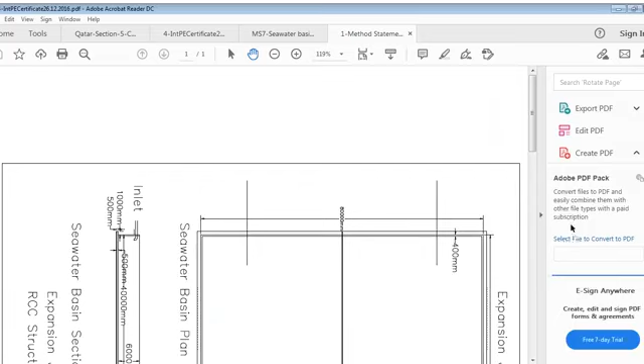This is some basin for which I will talk about water tightness. Now, in this range, has some information about this. We talked of concrete yesterday, and we'll go back to that one.

We go to this file, section 5 of concrete, and I was at, I think I don't know which page it was. We had talked of precast concrete. Precast concrete - we had to talk of precast concrete. This was actually not recorded.

Structural precast concrete - this was not recorded due to technical problem, I don't know what. I wrote to them but no answer. So I'm going back to talk of it again. Structural concrete again. Structural precast concrete - previous was we have completed that with structural precast concrete, and the end of the part was something else. So now we are going to talk of structural precast concrete.

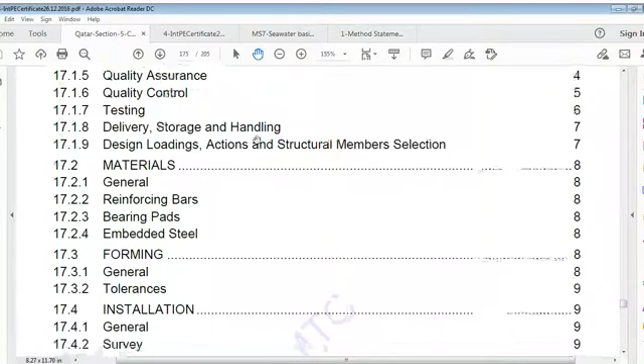General scope, references, submittals, qualifications, quality assurance, quality control, testing, delivery, storage and handling, design, loading actions, and structural member selection, material, general reinforcing bars, bearing pads, embedded steel forming, general tolerances and installation, general survey, guying, bracing and shoring, adjustments and correction, erection tolerances, welding, grouting, and field cutting.

Structural precast concrete - work included in this section comprises furnishing all plant, labor, equipment, appliances, and material, and performing all operations in connection with structural precast concrete works. Let me put my mask on better.

This aggregates - this is part 2 aggregates, part 3 is cementitious materials, part 5 admixtures, part 6 property requirement, part 7 concrete plants, part 8 transportation and placing of concrete, part 9 formwork, part 10 curing, part 11 reinforcement, part 15 hot weather concreting.

References are AASHTO standard specification for highway bridges, section 25, ACI 523.2 guide for precast cellular concrete floor, roof, and wall units, ACI 533 guide for precast concrete wall panels, ACI 533.1 on design responsibility for architectural precast concrete projects, ACI 543 design manufacture and installation of concrete piles.

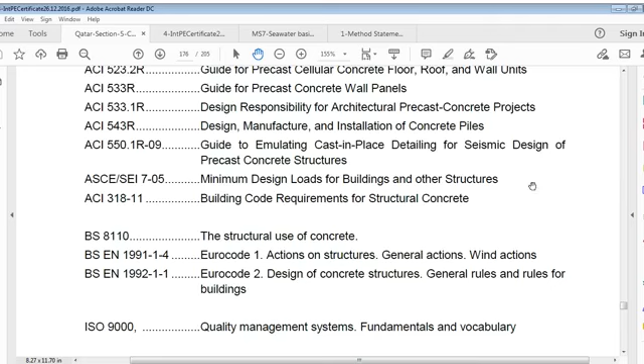ACI 550.1 guide to emulating cast-in-place detailing for seismic design of precast concrete structures. ASCE 7-05 minimum design loads for buildings and other structures. ACI 318-11 building code requirements for structural concrete. BS 8110 structural concrete. BS EN 1991-1-4 Eurocode 1, actions on structures, general actions, wind actions.

BS EN 1992-1-1 Eurocode 2, design of concrete structures, general rules and rules for buildings. ISO 9000 quality management systems fundamentals and vocabulary. Prestressed Concrete Institute, PCI manual 116.

Submittals: manufacturer's literature. Contractor shall provide copies of manufacturer's specifications and installation instructions for each item of proprietary material to be used, showing compliance with this specification. Information on equipment, embedded items, and other accessories shall also be provided. Design mixes: copies of mix design, support materials; requirements of mix design shall be in accordance with part 6 and 7 of this section. Product design criteria, loading for designs.

Initial handling and erection stresses. All dead and live loads per specification on contract drawings or as required. All other loads specified for member where they are applicable.

Product design calculation: design calculation shall be performed by a structural engineer experienced in precast concrete works. They shall cover all the stages of handling, transportation, and erection. Design shall be carried out in accordance with requirements of BS EN 1992-1-1 or relevant ACI codes and shall be accepted by the engineer. Calculations for design of precast members shall be supported by a statement explaining principles of design and type of analysis adopted. Influence of individual members in achieving overall stability of structure should be considered.

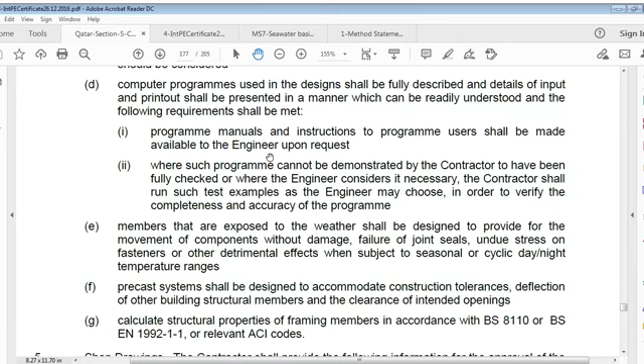Computer program used in this design shall be fully described and detailed. Inputs and printouts shall be presented in a manner which can readily be understood, and the following requirements shall be met. Program manuals and instructions to program users shall be made available to the engineer upon request where such a program cannot be demonstrated by a contractor to have been fully checked, or where the engineer considers necessary. Contractor shall run such test examples as the engineer may choose in order to verify completeness and accuracy of the program.

Members that are exposed to weather shall be designed to provide for the movement of components without damage, failure of joint seals, undue stress on fasteners, or other detrimental effects, and subject to seasonal or cyclic day-night temperature range.

Precast systems shall be designed to accommodate construction tolerances, deflection of other building structural members, and clearance of intended openings. Calculate structural properties of framing members in accordance with BS 8110 or BS EN 1992-1-1 or relevant ACI codes.

Shop drawings: contractors shall provide the following information for approval of the engineer, a layout plan and detailed fabrication and placement drawings for each structural precast element. Shop drawings are to include the following information: size, grade, profile, and dimensions of all materials used.

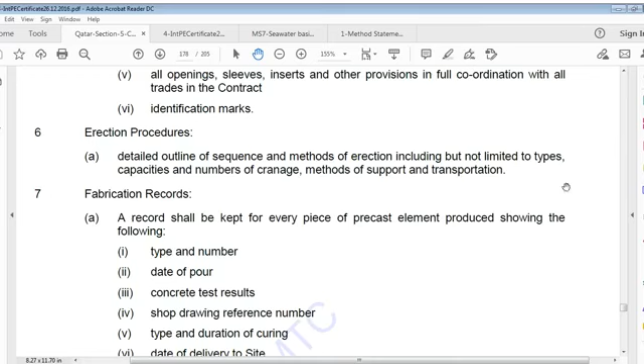Connection and anchorage details, lifting devices, location, handling limitations, steel reinforcement details, all opening sleeves, inserts, and other provisions in full coordination with trades in the contract, identification marks, and erection procedure. A detailed outline of the sequence and methods of erection, including but not limited to types, capacities and numbers of cranage, method, support, and transportation.

Fabrication records: a record shall be kept for every piece of precast element produced, showing type and number, date of pour, concrete test results, shop drawing reference number, type and duration of curing, date of delivery at site, and date of fixing in position. Test reports: copies of all testing and inspection reports, and test trial panels.

The contractor shall provide these trial panels in accordance with the requirements of Part 1 of this section. Trial panels shall be retained for reference purposes for acceptance of production work.

Qualifications: structural precast work shall be executed by an approved specialist subcontractor for casting and also for transportation, handling and erection. The contractor may execute this work himself if it can satisfy the engineer that it has sufficient experience and expertise in this field.

As a minimum, the contractor shall provide satisfactory evidence that tradesmen and their supervisory personnel engaged in such work have successful experience with work comparable to that shown and specified, and provide details of organized quality control and testing procedures.

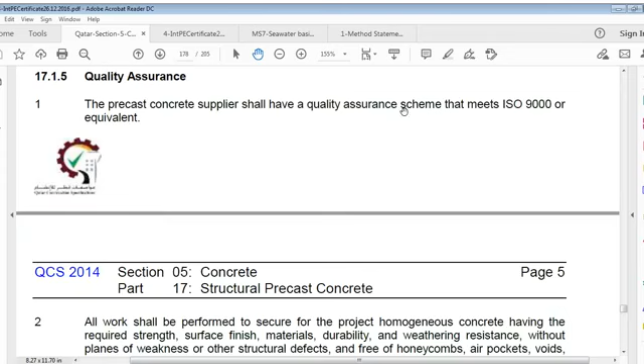Quality assurance: precast concrete supplier shall have a quality assurance scheme that meets ISO 9000 or equivalent. All work shall be performed to secure for the project homogeneous concrete having required strength, surface finish, materials, durability and weathering resistance, without planes of weakness or other structural defects, and free of honeycombs, air pockets, voids, projections, offsets of plane, and other defacement of concrete.

No alteration or substitution of the structural system shown on the drawing is permitted unless otherwise specified. The contractor shall supervise and coordinate all phases of the structural precast concrete construction process and be responsible for the complete manufacturing process.

All methods of manufacture and practices of handling raw materials and manufactured concrete shall be reviewed by the engineer before execution of structural precast concrete work, at least 14 days before the beginning of precasting work.

Only materials of known quality shall be incorporated in the work. All materials shall be properly selected, reviewed and approved by the engineer before use and maintained during shipment, storage and use. Construction systems and techniques shall be properly selected, reviewed and approved by the engineer before use and maintained throughout the complete structural precast concrete construction phases.

Adequate spare equipment, parts, additional components and repair facilities shall be available for all tools and equipment. Regardless of approvals by the engineer, the contractor shall be responsible for all methods of structural precast concrete work.

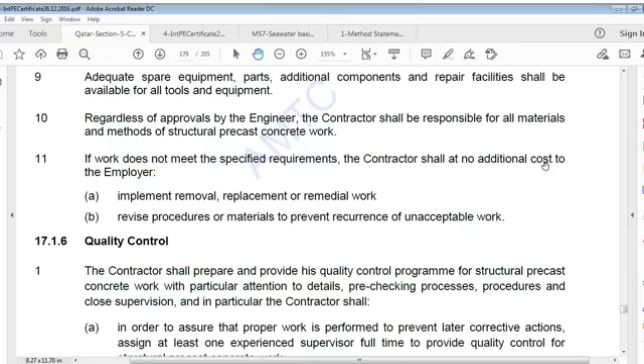If work does not meet specified requirements, the contractor shall, at no additional cost to the employer, implement removal, replacement or remedial works, and revise procedures or materials to prevent recurrence of unacceptable work.

Quality control: the contractor shall prepare and provide a quality control program for structural precast concrete work, with particular attention to details, pre-checking procedures and close supervision. In particular, the contractor shall, in order to ensure that proper work is performed to prevent later corrective actions, assign at least one experienced supervisor full-time to provide quality control for structural precast concrete work.

This assignment will not relieve the contractor's other quality control personnel of their duties related to quality control of structural requirements and surface finish of structural precast concrete work.

The contractor shall arrange for training of its quality control personnel who perform quality control of structural precast concrete work, and whose training shall include but not be limited to material evaluation, special mix design technique, mix placement, vibrator selection and use, formwork detail, formwork protection, release agent use, reinforcing steel detailing and installation, finishing equipment and technique, corrective procedures, and protection of completed work.

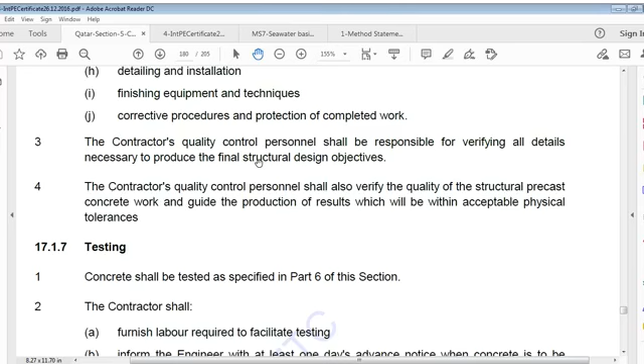The contractor's quality control person shall be responsible for verifying all details necessary to produce the final structural design objectives, and shall also verify quality of structural precast concrete work and guide production of results within acceptable physical tolerances.

Testing: concrete shall be tested as specified in Part 6 of this section. The contractor shall furnish labor required to facilitate testing, and inform the engineer with at least one day's advance notice when concrete is to be placed.

Provide facilities for the concrete cube test. Test cubes: provide material samples and access to materials as required for testing. Should the batching plant be located more than 500 meters away from the site office?

Contractor shall provide suitable transport accessible to the engineer for the sole use of the engineer's staff. Contractor shall station a qualified technician at the casting site to continuously test, inspect and report on the following.

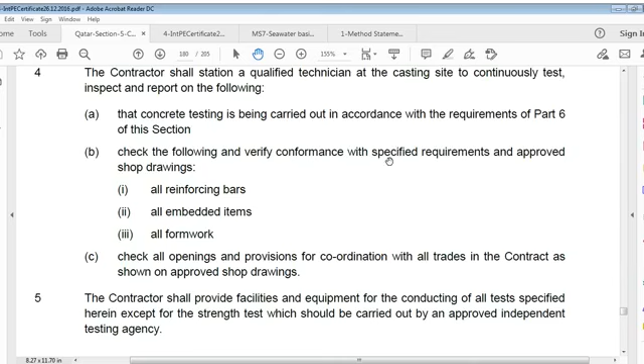Concrete testing is to be carried out in accordance with the requirements of Part 6 of this section. Check the following and verify conformance with the specified requirements and approved shop drawings: all reinforcing bars, embedded items, and formwork.

Contractor shall provide facilities and equipment for conducting all tests specified herein, except for strength tests, which shall be carried out by an approved independent testing agency. Delivery, storage and handling.

Structural precast elements shall be removed from the form without damaging or overstressing, and stored and placed in transportation on a stable bed that shall not allow distortion of the member. Separate stacked members with suitable battens and bracing. Mark each member with an identifying reference or piece mark and date of casting. All piece marks are to be correlated with test reports and the plan layout or erection drawing.

Structural precast elements shall be transported with sufficient battens, bracing and supports so as to prevent overstress by vibration or impact loading. The contractor shall submit the proposed method of transportation to the engineer for approval.

Structural precast units shall be stored, handled and transported in a manner that avoids undue strains, cracks or other damage. The contractor shall deliver units from the casting site to the project site in accordance with the schedule and proper setting sequence. Structural precast units shall be stored free of the ground and protected from wind or rain splashes.

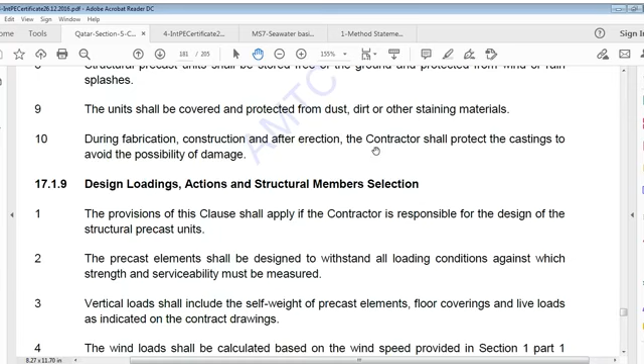Units shall be covered and protected from dust, dirt or other staining materials. During fabrication, construction and after erection, the contractor shall protect castings to avoid the possibility of damage.

Design, loading actions and structural member selection. The provisions of this clause shall apply if the contractor is responsible for the design of structural precast units. Precast elements shall be designed to withstand all loading conditions against which strength and serviceability must be measured. Vertical load shall include the self-weight of precast elements, floor coverings and live loads as indicated on contract drawings.

Wind load shall be calculated based on the wind speed provisions in Section 1, Part 1, Clause 152. Account shall be taken of loads and deformation caused by temperature and time-dependent deformations. For this purpose, a 55 degree Celsius temperature variation and 90% relative humidity should be considered for all members, except exterior and facade elements, which shall consider 85 degrees Celsius.

Precast elements shall be designed in accordance with BS EN 1992-1 or the relevant ACI code. Design tensile stress should not exceed the design flexural tensile stress of concrete at the particular age of concrete. Nominal cover to steel, including links, must meet the durability requirements of severe exposure conditions and meet the requirements of a 2-hour fire resistance period as provided in BS EN 1992-1-1 or the relevant ACI code. Total deflection of precast elements should be limited to 1/350 of the span of the element.

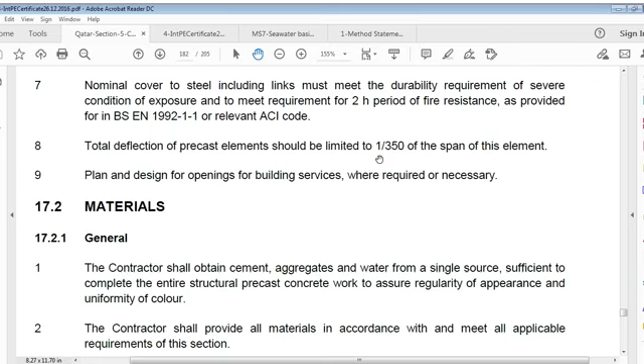Plan and design openings for building services where necessary. Contractor shall obtain cement, aggregate and water from a single source sufficient to complete the entire structural precast concrete work to assure regularity of appearance and uniformity of color. Again, the contractor shall obtain cement, aggregate and water from a single source sufficient to complete the entire structural precast concrete work to ensure regularity of appearance and uniformity of color.

Contractor shall provide all materials in accordance with and meeting all applicable requirements of this section. Reinforcing bars shall conform to the requirements of Part 11 of this section. Bearing pads shall be elastomeric neoprene bearing pads.

Bearing pads shall conform to the AASHTO standard specification for highway bridges, Section 25, with the following stipulations: use unfactored load for design. Maximum compressive stress 0.7 MPa, maximum shear stress 0.07 MPa, maximum shear deformation half the thickness, maximum compressive strain 15%. Embedded steel: all embedded items shall be of stainless steel grade 316L.

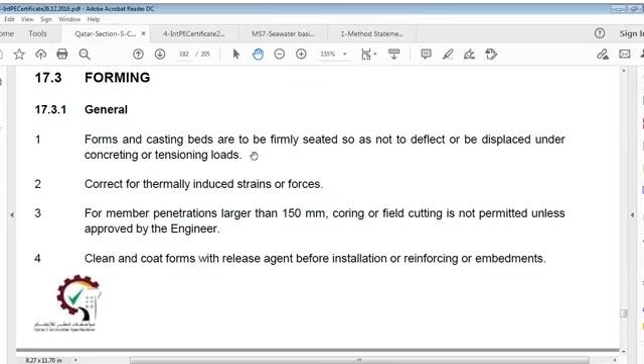Forming, general: forms and casting beds are to be firmly seated so as not to deflect or be displaced under concreting or tensioning load, and corrected for thermally induced strains or forces. For member penetrations larger than 150 mm, coring or field cutting is not permitted unless approved by the engineer. Clean and coat forms with a release agent before installation of reinforcing or embedments.

Tolerance: permissible deviation of formed surfaces are not to exceed tolerances outlined in PCI Manual 116, where items are summarized or modified in Table 17.1, tolerances for structural precast concrete.

Dimensions: length is plus or minus 5 mm, width is plus or minus 3 mm, thickness for stem is plus or minus 3 mm, flanges plus or minus 2 mm, embedment or penetration location plus or minus 0.2%, straightness plus or minus 3 mm for 300 centimeters or 3 meters, and squareness plus or minus 3 mm.

Installation, general.

Installation general. The contractor's erection responsibilities include safe and proper placing, aligning, and labeling of structural precast elements on accepted bearing surfaces and effecting their proper fastening.

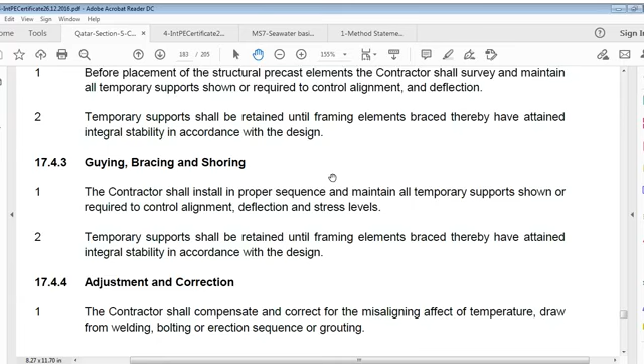Guying, bracing, and shoring. The contractor shall install in proper sequence and maintain all temporary supports shown or required to control alignment, deflection, and stress level. Temporary supports shall be retained until framing elements are braced and have attained integral stability in accordance with design.

Adjustments and correction. The contractor shall compensate and correct for misaligning effects of temperature, draw from welding, bolting, erection sequence, or grouting. Erection tolerances follow, unless otherwise specified.

Variation from plumb: 6 mm in a 6 meter run, meaning 1 mm per meter run, and 12 mm total in a 12 meter or longer run. It may be 18 meters, then even it's 12 mm.

Variation from level or elevation: 6 mm in runs, 12 mm in a 12 meter run, and maximum 12 mm at a single location.

Variation from position in plan: plus or minus 12 mm maximum. Offsets and alignment of adjacent members or joints: 1.5 mm in a 3 meter run, 6 mm maximum.

Welding. Where permission for welding is given by the engineer, the following shall apply: welding shall not proceed until all adjacent elements to be connected have been aligned, firmly seated, and braced. Control heat buildup by limiting voltage, electrode size, and rate.

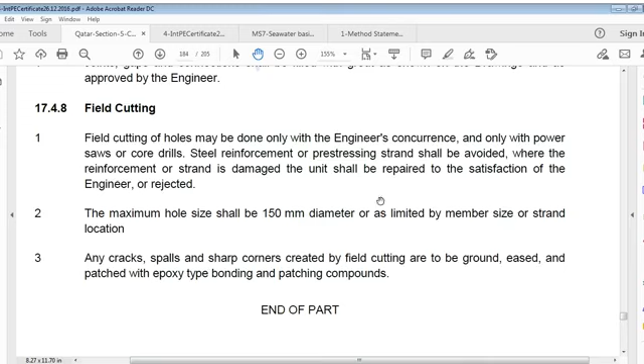Going to show you something like this.

Pre-stress concrete.

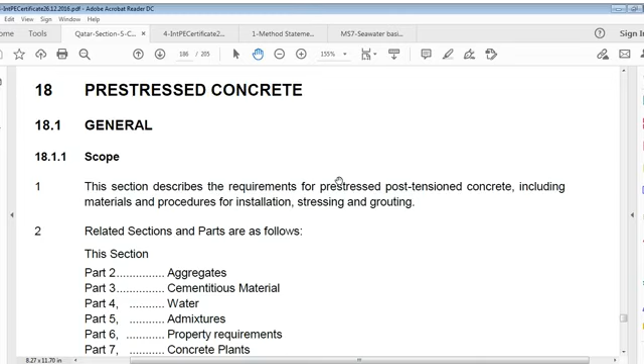This section describes requirements of pre-stress, post-tension concrete, including materials and procedures for installation, stressing, and grouting.

Related sections and parts are as follows: Part 2 aggregate, Part 3 cementitious material, Part 4 water, Part 5 admixtures, Part 6 property requirements, Part 7 concrete plants, Part 8 transportation and placing of concrete, Part 9 formwork, Part 10 curing, Part 11 reinforcement, Part 15 hot weather conditions, Part 16 miscellaneous.

ACI 423.3R recommendations for concrete members pre-stressed with unbonded tendons. ASTM A881/A881M standard specification for steel wire, deformed, stress relieved or low relaxation, for pre-stress concrete railroad ties. ASTM A882/A882M standard specification for filled epoxy coated 7 wire pre-stressing steel strand. ASTM A641/A641M standard specification for zinc coated galvanized carbon steel wire. ASTM A416/A416M standard specification for steel strand, uncoated 7 wire, for pre-stress concrete.

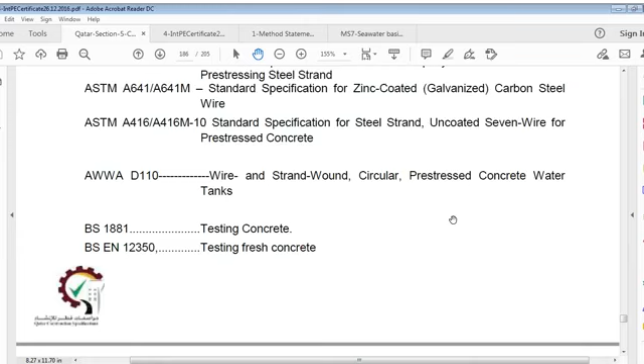AWWA D110 wire and strand wound circular pre-stress concrete water tanks. BS 1881 testing concrete. BS EN 12350 testing fresh concrete. BS EN 12390 testing hardened concrete. BS 5896 specification for high tensile steel wire and strand for pre-stressing of concrete. BS EN 1992 Eurocode 2 design of concrete structures. GSO ISO 1920 testing of concrete.

A 1 meter length sample of strand shall be taken from every 1000 meters (1 kilometer) of strand to be installed in works, with a minimum of 1 sample per reel on site in presence of engineer for strand testing at an independent laboratory approved by engineer. A reel shall only be accepted if both breaking load and...

0.1% proof load of sample exceeds characteristic load given in BS 5896 table 6. A minimum of 3 samples of strand shall be taken at random from each reel of pre-stressing steel on site in presence of engineer. Reel on site shall only be accepted if relaxation values determined by tests are equal to or lower than specified relaxation class of BS 5896. Sample requirements and frequency of pre-stressing wire shall meet requirements of AWWA D110 and ACI 372R.

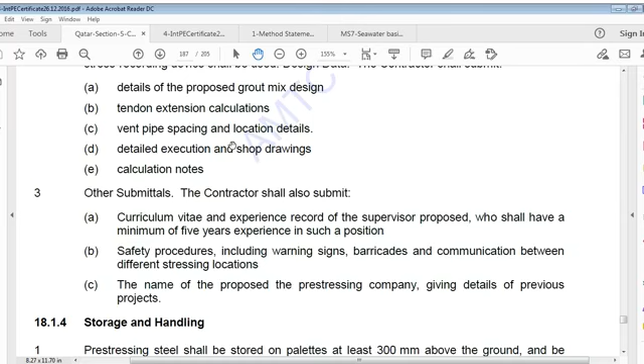Design data: contractor shall submit details of proposed grout mix design, tendon extension calculation, vent pipe spacing and location details, detailed execution and shop drawings, calculation notes, other submittals, and curriculum vitae and experience record of proposed supervisor, who shall have a minimum of 5 years experience in such a position.

Safety procedures including warning signs, barricades and communication between different stressing locations. Name of proposed pre-stressing company, giving details of previous projects.

Storage and handling: pre-stressing steel shall be stored on pallets at least 300 mm above ground and protected from contamination by wind blown sand or rain. Pre-stressing strand shall be in coils of sufficiently large diameter to ensure that strand pays off straight.

Pre-stressing general: pre-stressing operations shall be carried out only under direction of an experienced and competent supervisor, and all personnel operating stressing equipment shall have been properly trained in its use. In addition to normal precautions against accident taken at all times for the whole of works, special care shall be taken when working with or near tendons which have been tensioned or are in process of being tensioned. System of pre-stressing used shall be a system approved by engineer.

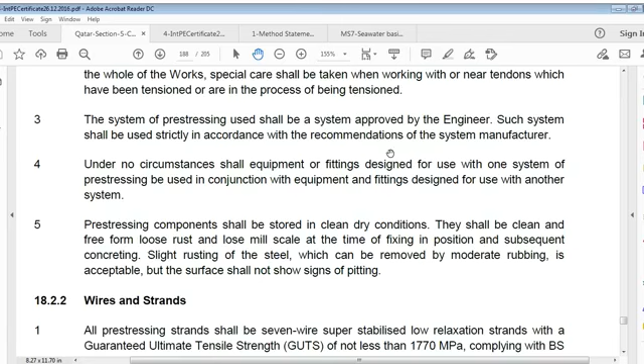Such system shall be used strictly in accordance with recommendations of system manufacturer. Under no circumstances shall equipment or fittings designed for use with one system of pre-stressing be used in conjunction with equipment and fittings designed for use with other systems.

Pre-stressing components shall be stored in clean dry condition. They shall be clean and free from loose rust and loose mill scale at time of fixing in position and subsequent concreting. Slight rusting of steel which can be removed by moderate rubbing is acceptable, but surface shall not show signs of pitting.

Wires and strands: all pre-stressing strands shall be 7 wires of super stabilized low relaxation strand with a guaranteed ultimate tensile strength (GUTS) of not less than 1770 MPa, complying with BS 5896 or relevant ASTM standards.

All pre-stressing wires shall be cold drawn, high carbon wire meeting requirements of ASTM A821/A821M Type B, having a minimum ultimate tensile strength of 1448 MPa (210,000 psi) prior to galvanizing.

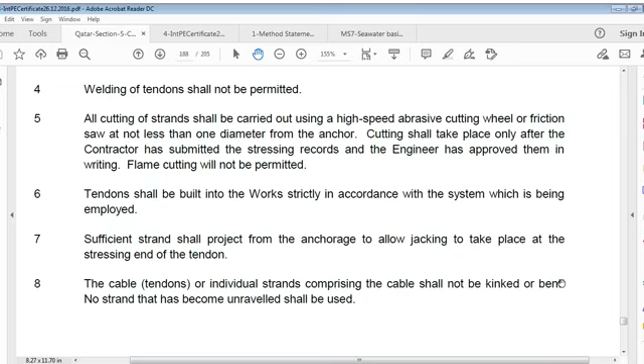Tendon shall be built into works strictly in accordance with the system being employed. Sufficient strand shall project from anchorage to allow jacking to take place at the stressing end of tendon. Cable—that is, tendons or individual strands comprising cable—shall not be kinked or bent. No strand that has become unraveled shall be used.

Pre-stress concrete. Sheaths, cores and ducts.

Just hold on. What is that?

Sheaths, cores and ducts. Sheaths shall be accurately located both vertically and horizontally as described in a specific project specification. Unless otherwise described in a specific project specification, tolerance in location of center line of sheath shall be within plus minus 5 mm.

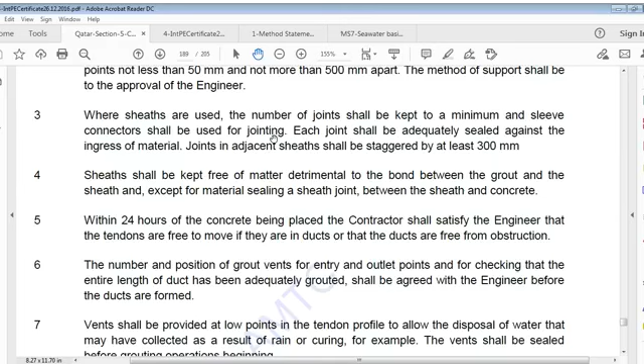Within 24 hours of concrete being placed, the contractor shall satisfy the engineer that tendons are free to move if they are in ducts, or that ducts are free from obstruction. Number and position of grout vents for entry and outlet points, and for checking that the entire length of duct has been adequately grouted, shall be agreed with the engineer before ducts are formed.

Vents shall be provided at low points in the tendon profile to allow disposal of water that may have collected as a result of rain or curing. Vents shall be sealed before grouting operations begin.

Anchorages. Anchorages and blocks and plates shall be positioned and maintained in position during concreting so that the center line of the duct passes axially through the anchorage assembly.

All bearing surfaces shall be clean before concreting and tensioning. Anchoring of pre-stressing wires shall meet requirements of AWWA D110 and ACI 372R.

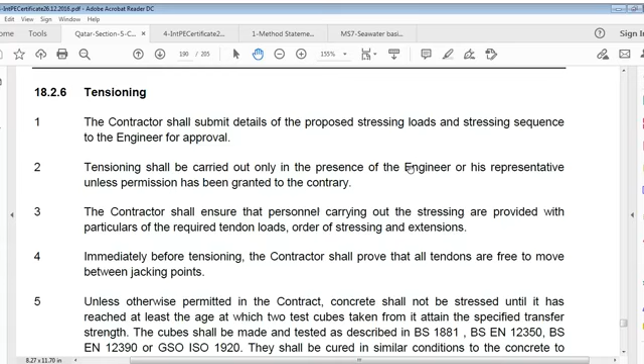Contractor shall submit details of proposed stressing solution, loads and stressing sequence to the engineer for approval. Tensioning shall be carried out only in the presence of the engineer or its representative unless permission has been granted to the contrary. Contractor shall ensure that personnel carrying out stressing are provided with particulars of required tendon loads, order of stressing and extensions. Immediately before tensioning, the contractor shall prove that all tendons are free to move between jacking points.

Unless otherwise permitted in contract, concrete shall not be stressed until it has reached at least the age at which 2 test cubes taken from it attain specified transfer strength. Cubes shall be made and tested as described in BS 1881, BS EN 12350, BS EN 12390 or GSO ISO 1920.

They shall be cured in similar conditions to the concrete to which they relate, and in a manner approved by the engineer.

Friction factors assumed for calculation of tendon extension shall be verified by on-site measurement of the force extension relationship of a typical sample of installed tendons. Contractor shall establish a datum point for measuring extension and jack pressure to the satisfaction of the engineer.

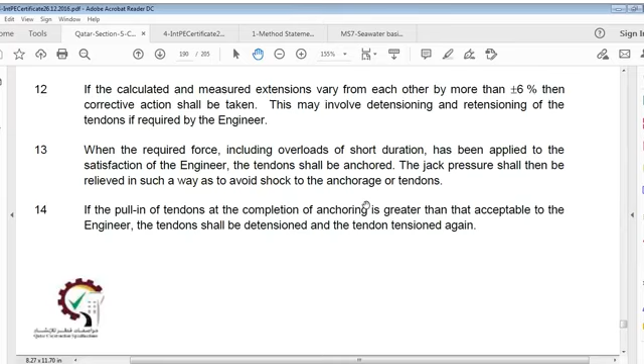If pull-in of tendons at completion of anchoring is greater than that acceptable to the engineer, the tendon shall be detensioned and tensioned again.

The engineer may direct that force in any tendon be tested by rejacking. This shall only be instructed if there is doubt that calibration of the tensioning equipment is accurate. Care shall be exercised by the contractor during tensioning to ensure that the jacking load does not exceed 80% of GUTS, the guaranteed ultimate tensile strength.

It is necessary to crop tendons to enable ducts to be grouted. This shall be delayed as long as practicable, close to the time of grouting. In all other cases, unless otherwise agreed with the engineer, the tendon shall not be cropped less than 3 days after grouting.

The contractor shall keep full records of all tensioning operations, including measured extensions, pressure gauge or load cell readings, and amount of pull-in at each anchorage. Copies of these records on suitable forms shall be supplied to the engineer within 24 hours of each tensioning operation.

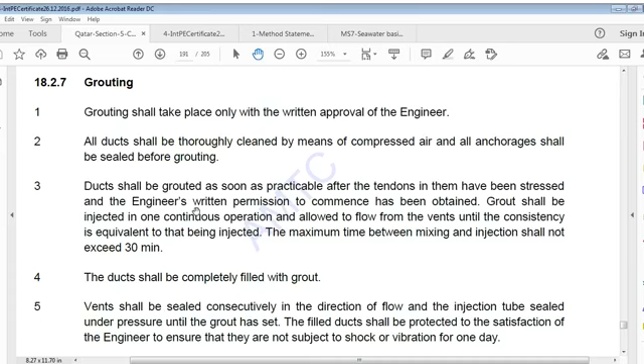The duct shall be completely filled with grout. Vents shall be sealed consecutively in the direction of flow, and the injection tube sealed under pressure until the grout has set.

Filled ducts shall be protected to the satisfaction of the engineer to ensure that they are not subject to shock or vibration for 1 day. 2 days after grouting, the level of grout in the injection and vent tubes shall be inspected and made good if necessary.

The contractor shall keep full records of grouting, including the date each duct was grouted, proportions of grout and admixtures used, pressure, details of interruptions, and topping up required. Copies of these records shall be supplied to the engineer within 3 days of grouting.

Pre-stressing wires shall be protected against corrosion and other damage by a shotcrete cover coat meeting the requirements of AWWA D110 and ACI 372. Grout mixer.

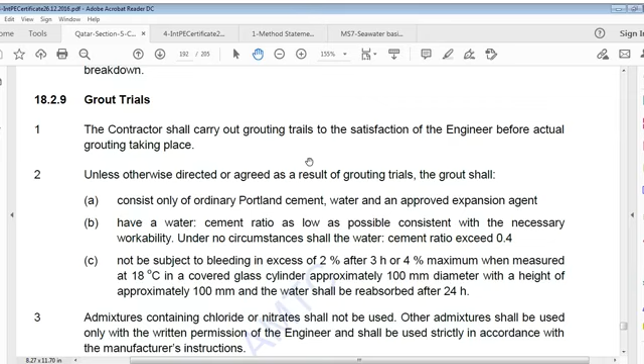Unless otherwise directed or agreed as a result of grouting trials, grout shall consist only of ordinary Portland cement, water, and an approved expansion agent, having a water cement ratio as low as possible, consistent with necessary workability. Under no circumstances shall the water cement ratio exceed 0.4.

The grout shall not be subject to bleeding in excess of 2% after 3 hours, or 4% maximum, when measured at 18 degrees Celsius in a covered glass cylinder approximately 100 mm diameter with a height of approximately 100 mm, and water shall be reabsorbed after 24 hours.

Admixtures containing chloride or nitrate shall not be used. Other admixtures shall be used only with written permission of the engineer and used strictly in accordance with the manufacturer's instructions. Grout shall be mixed for a minimum of 2 minutes and until a uniform consistency is obtained.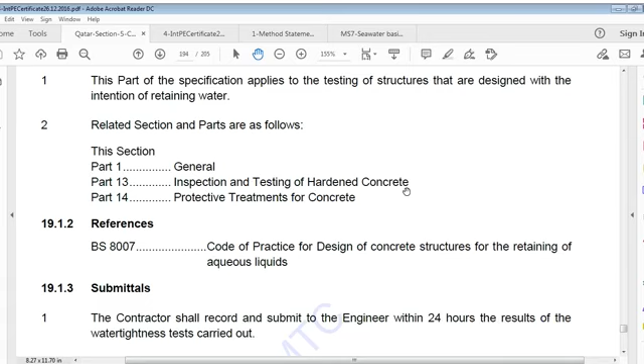Testing of water retaining structures. This part of specification applies to testing of structures that are designed with the intention of retaining water. Related sections that apply are General Part 1, Part 13 Inspection and Testing of Hardened Concrete, and Part 14 Protective Treatments for Concrete.

References: BS 8007, Code of Practice for Design of Concrete Structures for Retaining of Aqueous Liquids. Submittals: contractor shall record and submit to engineer, within 24 hours, results of water tightness tests carried out.

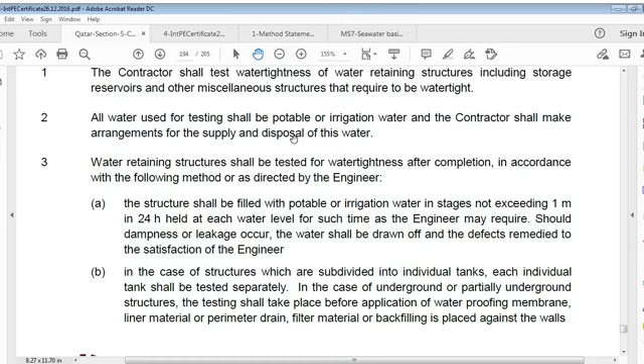General: water retaining structures shall be watertight when subject to external groundwater pressure or to test as specified in this part. That is, testing: contractor shall test water tightness of water retaining structures, including storage, reservoirs, and other miscellaneous structures that require to be watertight. All water used for testing shall be potable or irrigation water, and contractor shall make arrangements for supply and disposal of this water.

Water retaining structures be tested for water tightness after completion in accordance with the following methods, or as directed by engineer. The structure shall be filled with potable or irrigation water in stages not exceeding 1 meter in 24 hours, held at each water level for such time as engineer may require. Should dampness or leakage occur, water shall be drawn off and defects remedied to the satisfaction of engineer.

In case of structures which are subdivided into individual tanks, each individual tank shall be tested separately. In case of underground or partially underground structures, testing shall take place before application of waterproofing membrane, liner material, or perimeter drain, filter material, or backfilling is placed against walls.

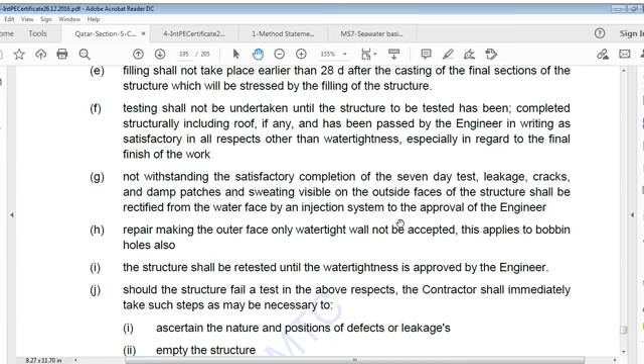Notwithstanding satisfactory completion of the 7 days test, leakage, cracks, damp patches and sweating visible on outside faces of structure shall be rectified from the water face by an injection system to approval of engineer. Repair making outer face only watertight will not be accepted. This applies to bobbin holes also.

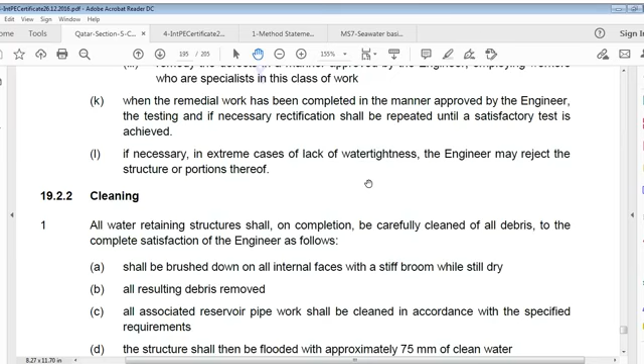Structure shall be retested until water tightness is approved by engineer. Should structure fail a test in above respects, contractor shall immediately take steps as may be necessary to ascertain nature and positions of defects or leakages, empty structure, and remedy defects in a manner approved by engineer, employing workers who are specialists in this class of work. When remedial work has been completed in a manner approved by engineer, testing, and if necessary rectification, be repeated until satisfactory test is achieved. If necessary, in extreme cases of lack of water tightness, engineer may reject structures or portions thereof.

Cleaning: all water retaining structures shall, on completion, be carefully cleaned of all debris to complete satisfaction of engineer as follows. Shall be brushed down on all internal faces with a stiff broom while still dry, and all resulting debris removed. All associated reservoir pipe work shall be cleaned in accordance with specified requirements.

A structure shall then be flooded with approximately 75 mm of clean water. Whole internal faces shall be carefully brushed down with stiff brooms using water continuously until all faces are clean. Water shall then be drained off, walls and floors hosed and flushed with clean water until perfectly clean.

Testing procedure: walls. Testing procedures.

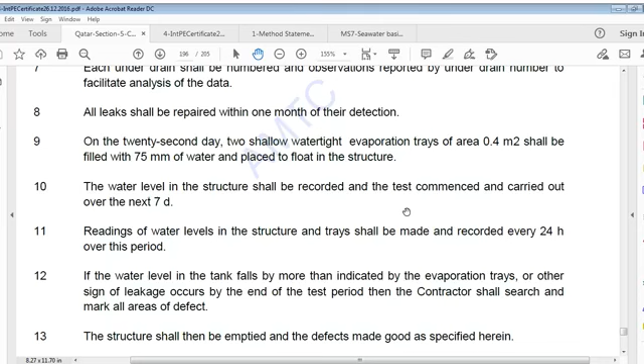Water level in structure shall be recorded and the test commenced and carried out over the next 7 days. Readings of water level in structure and trays shall be made and recorded every 24 hours over this period.

If water level in tank falls by more than indicated by the evaporation trays, or other sign of leakage occurs by end of test period, contractor shall search and mark all areas of defect. The structure shall then be emptied and defects made good as specified herein.

After completion of remedial measures, structure shall be refilled and tests repeated. This process shall be repeated until the structure is watertight to the satisfaction of the engineer.

Fall of water level in structure over test period of 7 days, minus fall accounted for by evaporation and rainfall, shall not exceed 1 over 500 of average water depth of full structure, or 10 mm, whichever is less.

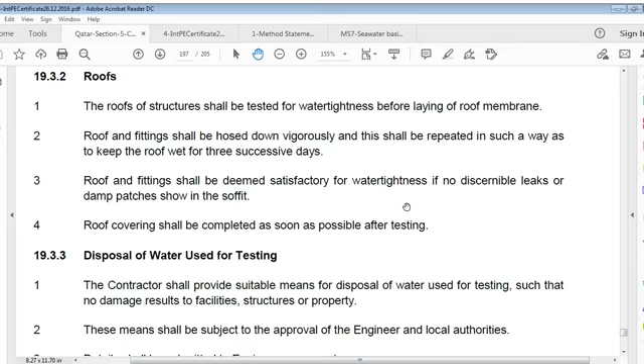Roof covering shall be completed as soon as possible after testing.

Disposal of water used for testing: contractor shall provide suitable means for disposal of water used for testing such that no damage results to facilities, structures or property.

These means shall be subject to approval of engineer and local authorities. Details shall be submitted to engineer on request. Contractor shall be responsible for damage caused by its filling, testing, flushing and wastewater disposal operations.

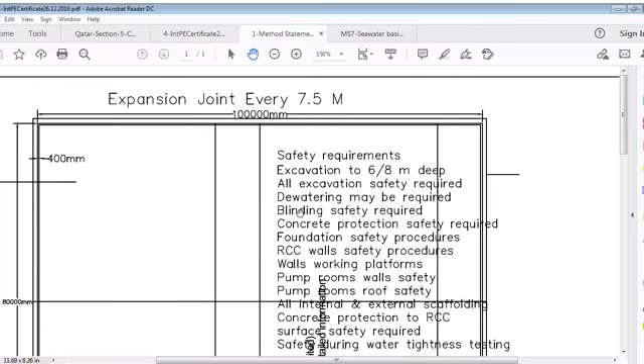Now, it has expansion joints every 7.5 meters and this wall is 400 mm thick. This is given here, and this portion is a slope between this level and this level. There are different levels, this is higher level and this is lower level. If you can see here in section, this is the section here.

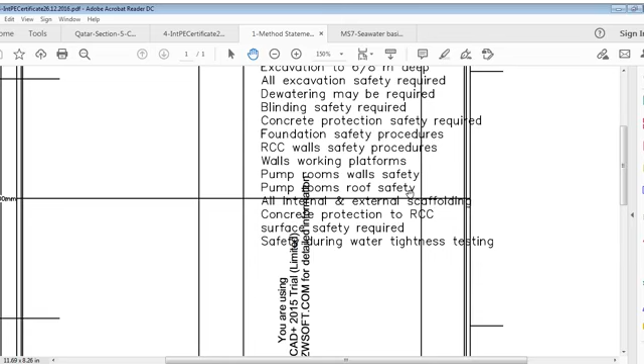Blinding safety required, concrete protection safety required, foundation safety procedures, RCC wall safety procedures, wall working platforms, pump rooms wall safety, pump rooms roof safety, all internal and external scaffolding, concrete protection to RCC surfaces safety required, safety during water tightness testing. This was just something.

So we are going to test this water structure, structural tank. This is a water retaining structure, seawater basin. It is called seawater basin. So basin it is, and you can yourself understand what big quantity of water is there because its size is...

100 meters and 80 meters itself, whereas this portion itself is 40 meters and this portion is 50 meters minimum. So I think something like that, and 10 meters something. So this is 50, this is 40, and this is 10. So this is 100 meters, and the quantity of water required you can understand yourself.

I will show you the calculations now. What we are going to do in this case, you have seen now the plan and section, so we can move further on this.

I'll give you now a statement on this: Seawater basin water tightness, BS 8007 1987. This is water tightness according to BS 8007. This is a code, a very reliable code, and generally it is used for testing hydraulic structures or water retaining structures. Now what is given here is the scope of this.

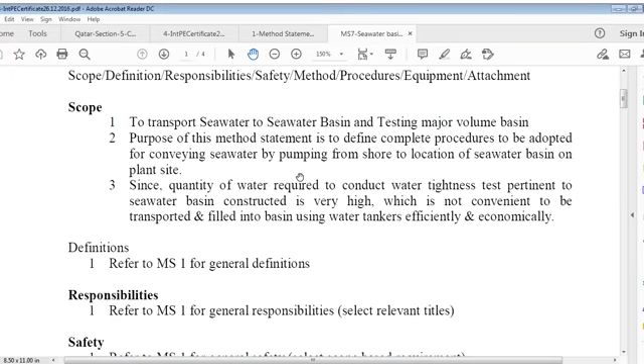Now, to transport seawater to the seawater basin and for testing major volume, this method statement is to be defined to define complete procedures to be adopted for conveying seawater by pumping from shore to the location of the seawater basin on plant site. It's only for the purpose of testing, because seawater would come through permanent pipes, ductile iron pipes. Two ductile iron pipes are placed, so that's a different matter.

We are just talking of testing. We are not talking of communication or conveyance of water, how it shall happen. We are just talking of something for the purpose of testing, because this seawater, let's say we are not going to use potable water in this case. Already it is going to work as seawater.

Now to transport this water, okay, that's one point. It's up to us whether we take seawater or we take water directly by tankers. It's a different matter. Now I am just giving a method for how to test seawater, how to test the water tank, the water retaining structure. The purpose of this method statement is to define the complete procedure to be adopted for conveying seawater by pumping from shore to location. Since the quantity of water required to conduct the water tightness test pertinent to seawater basin constructed is very high, it is not convenient to be transported and filled into the basin using water tankers efficiently and economically.

Depends still. Now, definitions something else, responsibility something else. Leave that aside because we are not concerned with responsibility. We are just saying now.

Refer to this sketch I was showing here, this was general safety, because we have to check about traffic, how to divert traffic. Traffic directory signs for ramp, breakers on the road crossing shall be installed, and on exposed pipe route safety tags shall be installed with cones. Protection arrangement shall be made for plants at intakes. A full-time dedicated attendant shall be kept. All these are safety measures.

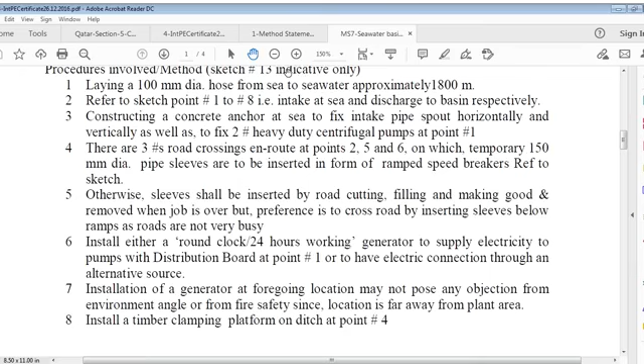Now we are talking of something else. Laying 100 mm diameter hose from sea to sea water, approximately 1800 meters or 1.8 kilometers. Refer to sketch point 1 to 8, not included here. Intake at sea and discharge to basin respectively. Construction of concrete anchor at sea to fix the intake pipe sprout horizontally and vertically, as well as to fix 2 heavy duty centrifugal pumps at point number 1, not shown here. We took that at sea where we wanted to bring water in, and put all that there.

There are 3 road crossings on the way, shown at points 2, 5 and 6 on that sketch. For this we provide pipe sleeves inserted in the road in the form of ramped speed breakers, etc. Otherwise sleeves shall be inserted by road cutting, filling, and making good when the job is over. My preference is to cross the road by inserting the sleeve below a ramp, as the roads are not very busy.

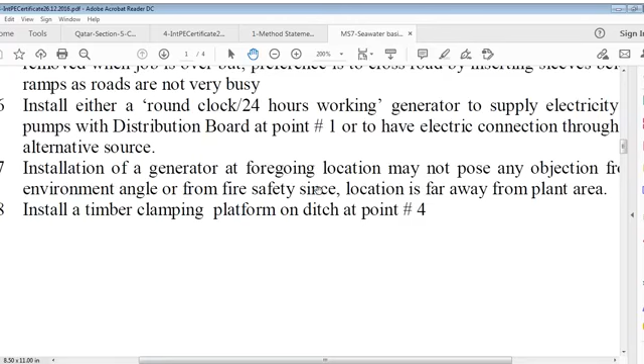Install either a round the clock 24-hour working generator to supply electricity to pumps with a distribution board at point 1, not shown, or have electric connection through installation of a generator at force point. The foregoing location may not pose any objection from an environmental angle or fire safety sense, as the location is far away from the plant area. Install a timber clamping platform.

Now, the water head calculation is indicative only. Head loss: at the intake section, 1 meter loss; at intake disposal, vertical head loss is 25 meters; at point 8, loss is 10 meters; total vertical head loss is 37 meters. Length of pipe for friction loss is 1800 meters. Using 4fLV square over 2gD for pipe friction, with friction coefficient 0.015, equals 4 into 0.015 into 1800 into 1.5 into 1.5, divided by 2 into 9.81 into 0.1, equals 123.9 meters. Total head loss equals static loss plus dynamic loss, equals 37 plus 123.9, equals 160.9 meters.

Work done equals 42,000 into 160.9 kgm. BHP equals 42,000 into 160.9 divided by 270,000, equals 25 units. IHP equals 35 units.

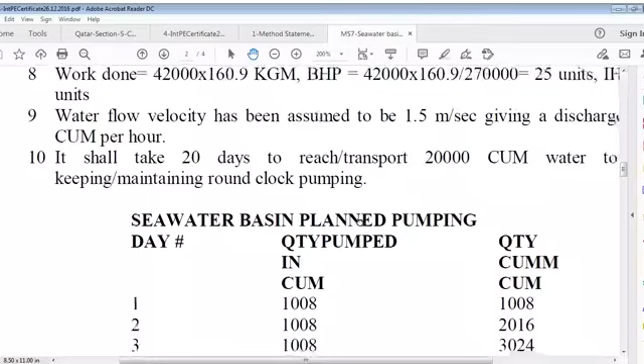Now water flow velocity has been assumed to be 1.5 meters per second, giving a discharge of 42 cubic meters per hour. It shall take 20 days to transport 20,000 cubic meters of water to the basin, maintaining round the clock pumping. Now, seawater basin planned pumping.

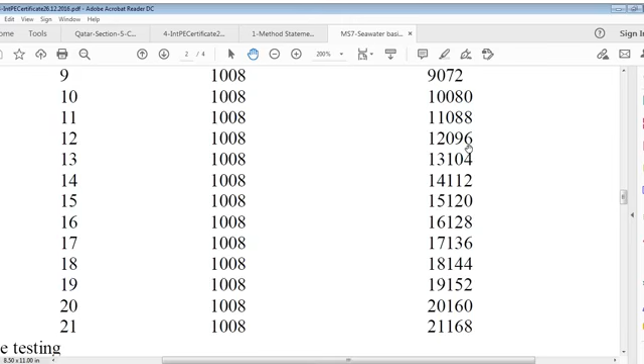What is this planned pumping schedule? One column is day, the next is quantity pumped in, and the third is cumulative quantity. Day 1 we take 1008 cubic meters, per our requirement. Each subsequent day adds another 1008 cubic meters: day 2 cumulative is 2016, day 3 is 3024, day 4 is 4032, day 5 is 5040, day 6 is 6048, day 7 is 7056, day 8 is 8064, day 9 is 9072, day 10 is 10,080, day 11 is 11,088, day 12 is 12,096, day 13 is 13,104, day 14 is 14,112, day 15 is 15,120, day 16 is 16,128, day 17 is 17,136, day 18 is 18,144, day 19 is 19,152, day 20 is 20,160, and day 21 is 21,168 cubic meters.

First phase testing: the tank, completed with protective coatings as specified and sealant applied, shall be cleaned and filled to normal maximum level to meet requirements of clause 9.2, BS 8007 1987. Testing of the structure up to 11.5 meters should take 14 days, and then retained for a stabilizing, absorption, and autogenous healing period of 7 days for maximum design crack width of 0.1 mm.

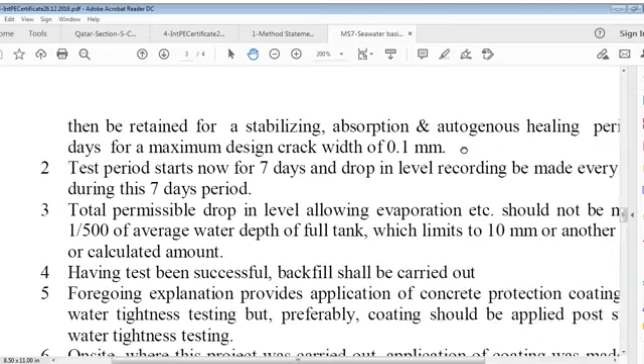What does it say? It says first phase testing: the tank completed with protective coatings as specified and sealed. Well, it depends - BS 8007 doesn't accept that, but something is wrong with the specification. Well, we are talking of procedure.

And sealant applied shall be cleaned and filled to normal maximum level to meet requirements of clause BS 8007 1987. Testing of structures, up to 11.5 meters, should take 14 days, and then be retained for a stabilization, absorption, and autogenous healing period of 7 days for maximum design crack width of 0.1 mm.

The test period starts now for 7 days, and drop in level recording is to be made every 24 hours during this 7-day period. Total permissible drop in level, allowing for evaporation etc., should not be more than 1/500 of average water depth of a full tank, which limits to 10 mm, or another specified or calculated amount.

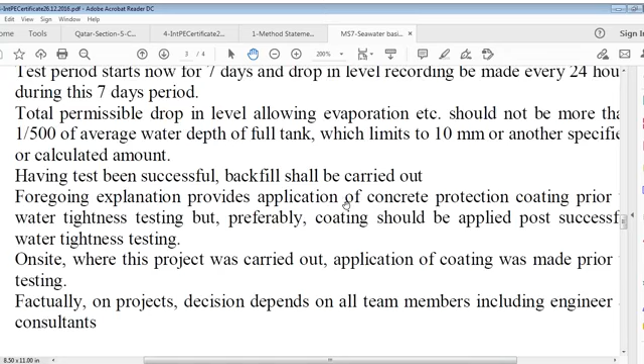Having the test been successful, backfill shall be carried out. The foregoing explanation provides application of concrete protection coating prior to water tightness testing, but preferably coating should be applied post successful water tightness testing. On site where this project was carried out, application of coating was made prior to testing. Factually, on projects, the decision depends on all team members, including engineer and consultants.

Second phase testing. Tank shall be further filled up to 13 meter level, that is another 7 days should be allowed for stabilization, another 7 days for absorption and autogenous healing. Test period another 7 days, with level drop recording at an interval of 24 hours.

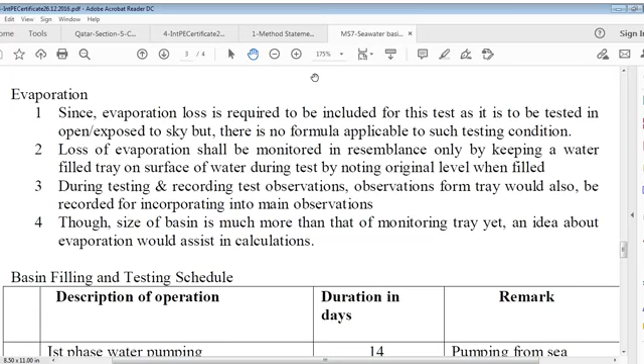Evaporation. Since evaporation loss is required to be included for this test, as it is to be tested in the open, exposed to sky, but there is no formula applicable to such a testing condition, loss of evaporation shall be monitored in resemblance only by keeping a water filled tray on the surface of water during the test, by noting the original level when filled. Now, during testing and recording, test observations from the tray would also be recorded for incorporation into main observations. Though the size of the basin is much more than that of the monitoring tray, yet an idea about evaporation would assist in calculations.

Basin filling and testing schedule. First phase, water pumping duration 14 days, pumping from sea, that is 14 days pumping of sea. Then retained water stabilization to allow absorption and autogenous healing, 7 days. So 14 and 7, 21 days. 14 is for filling, and stabilization period 7 days. Then testing at 24 hour intervals and monitoring, that is 7 days more. Loss should not be more than 1/500 of average full water depth or 10mm, or other specified value, but excluding evaporation. Now backfilling after successful testing, 14 days. So 14 plus 7 plus 7 plus 14, this is 42 days.

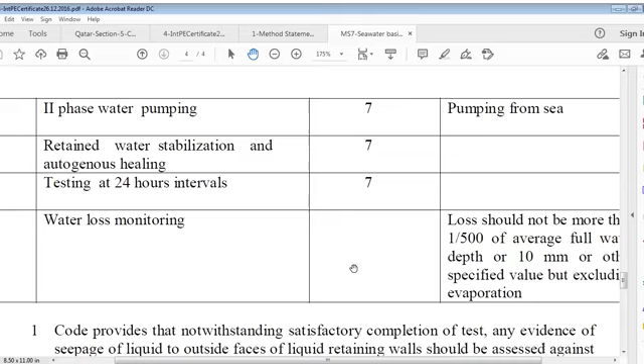Now second phase - this was the first phase, 14 days for filling and then retention for 7 days, testing for 7 days, and backfill after successful testing. Second phase, water pumping 7 days, pumping from sea, retention period or retained water stabilization and autogenous healing 7 days, and testing at 24 hour interval, 7 days. Water loss monitoring, loss should not be more than 1/500 of average full water depth or 10mm or other specified value, but excluding evaporation.

Now the code provides for notwithstanding satisfactory completion of test, whatever evidence of seepage of liquid to outside faces of liquid retaining walls should be assessed against requirements of specification. Whatever necessary remedial measures, remedial treatment of concrete, cracks or joints should, where practicable, be carried out from the liquid face. When a remedial lining is applied to inhibit leakage at a crack, it should have adequate flexibility and have no reaction with the stored liquid. Should the structure not satisfy the 7 days test, then after completion of remedial work, it should be refilled and, if necessary, left for a further stabilization period, followed by a further test of 7 days duration, undertaken in accordance with this clause.

Equipment in this case are pumps YHP 35, 2 numbers, other general arrangements, hose pipes, attachments. Okay, that is there, that's no meaning.

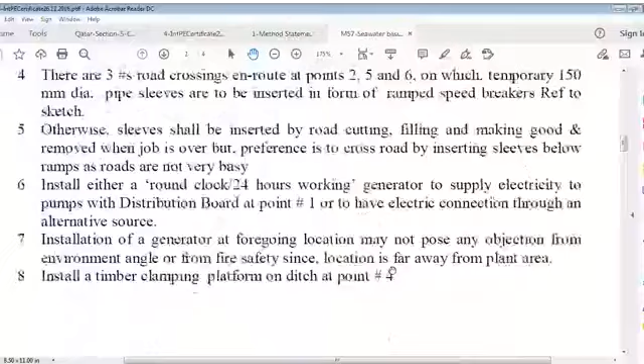So we have gone through this small procedure of how to do this test. Just for your elaboration, I read it so that you may understand how to calculate this engineering activity. This is a very important part of water retaining structures, and I have already given you the importance of this big tank, which is 100 meter by 80 meter and 6 meter and 10 meter depth in 2 locations, with slope, and the sketch of this I have given to you. This is the sketch, scope - these 2 points are very important. And now I think you got this point of water retaining importance. It's a very, very important point.

We can't take it for granted. It's a very important point in structural engineering, and it takes time, and we have to cover contract time accordingly. You can't ignore this activity just because you don't like it. It's very important - it may not be necessary, this is also such a big tank, but even a small tank, underground tank or ground tank or overhead, whatever it is, all are tested. Must be tested. It was a case of a water retaining structure of seawater basin. This could be an underground sump tank, or it could be a lagoon, or it could be an outfall chamber. It can be whatever else - a smaller or bigger tank, all accordingly, or maybe a swimming pool or whatever. You can't say no, it has to apply. This is a professional activity, and if your tank is not tested accordingly, you cannot give a tank stability certificate. And if you give it, you are not honest to yourself. So simple.

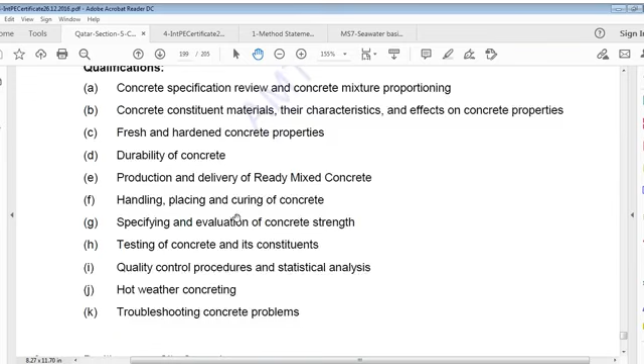So the technical manager or quality control manager, whosoever it is, must have this knowledge as part of the qualification. What should that person know? He should know concrete specifications and concrete mixture proportioning, concrete constituent materials and their characteristics and effects on concrete properties, fresh and hardened concrete properties, durability of concrete, production and delivery of ready mix concrete, handling, placing and curing of concrete, specifying and evaluation of concrete strength, testing of concrete and its constituents, quality control procedures and statistical analysis, hot weather concreting, and troubleshooting concrete problems. This means this knowledge cannot be had by an ordinary professional.

One should be an engineer, qualified and experienced. Only then...

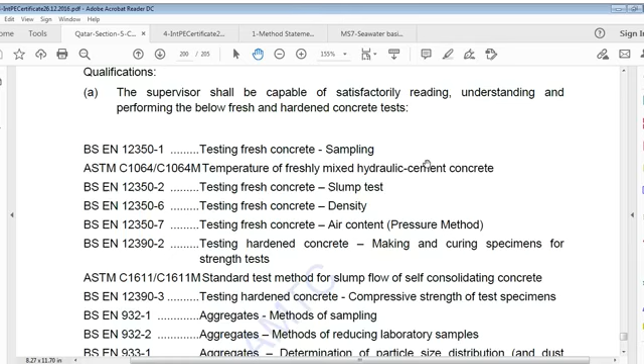BSEN 12390-2 testing hardened concrete, making and curing specimens for strength tests. ASTM C1611/C1611M standard test method for slump flow of self-consolidating concrete. BSEN 12390-3 testing hardened concrete, compressive strength of test specimen. BSEN 932-1 aggregates method of sampling. BSEN 932-2 aggregates method of reducing laboratory samples. BSEN 933-1 aggregates determination of particle size distribution and dust content. BSEN 1097-6 aggregates determination of particle density and water absorption. BSEN 1097-3 aggregates determination of loose bulk density and voids. ASTM C566 method of determination of moisture content.

Site technician, compulsory if requested by engineer. The technician shall be capable of satisfactorily performing the below fresh concrete tests: BSEN 12350-1 testing fresh concrete sampling, ASTM C1064/C1064M temperature of freshly mixed hydraulic cement concrete, testing fresh concrete slump test, BSEN 12350-6 testing fresh concrete density, BSEN 12390-2 testing hardened concrete making and curing specimen for strength test, ASTM C1611/C1611M standard test method for slump flow of self-consolidating concrete. Then, lab technician position, compulsory if required by engineer.

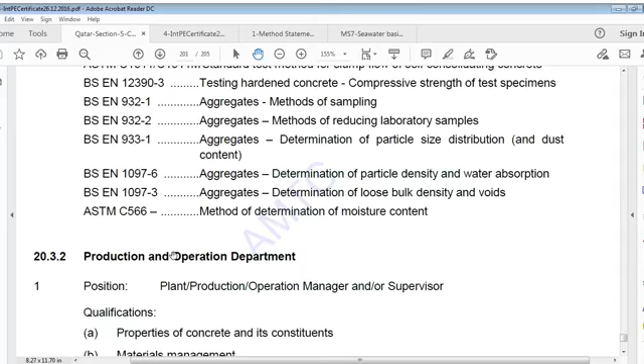BSEN 932-2 aggregates method of reducing laboratory samples. BSEN 933-1 aggregates determination of particle size distribution and dust content. BSEN 1097-6 aggregates determination of particle density and water absorption. BSEN 1097-3 aggregate determination of loose bulk density and voids. ASTM C566 method of determination of moisture content. Production and operation department, position plant production operation manager and supervisor, qualifications: properties of concrete and its constituents.

Material management, plant design, function and maintenance, batching operations, procedures and dispatching, material management and inventory, safety regulations and procedures.

Position is plant operator. Qualifications: basic concrete properties and characteristics of its constituents, scales, meters and batching, scale sequence and control system, central mixing and discharging, tolerances, overweight and underweight controls, troubleshooting scales, gates and other plant components, safety procedures, testing laboratories.

Concrete laboratory department, laboratory manager, QC manager qualifications requirement: concrete specifications review and concrete mixture proportioning, concrete constituent materials, their characteristics and effects on concrete properties, fresh and hardened concrete properties, durability of concrete, production and delivery of ready-mix concrete, handling, placing and curing of concrete, evaluation of concrete strength, testing of concrete and its constituents, quality control procedures and statistical analysis, hot weather concreting, troubleshooting concrete problems.

Now, supervisor qualifications. Supervisor shall be capable of satisfactorily reading, understanding and performing the below fresh and hardened concrete tests: BSEN 12350-1 testing fresh concrete sampling, ASTM C1064/C1064M temperature of freshly mixed hydraulic cement concrete, BSEN 12350-2 testing fresh concrete slump test, BSEN 12350-6 testing fresh concrete density, BSEN 12350-7 testing fresh concrete air content pressure method, BSEN 12390-2 testing hardened concrete making and curing specimen for strength test.

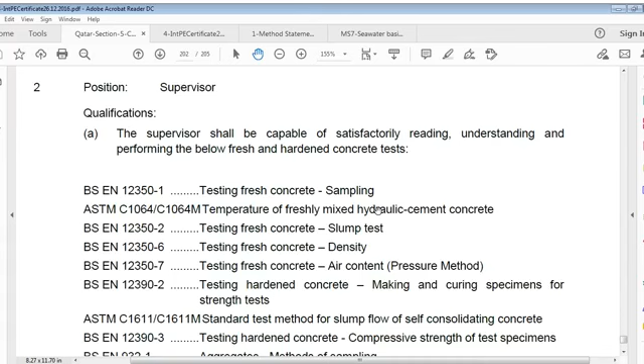ASTM C1611/C1611M standard test method for slump flow of self-consolidating concrete. BSEN 12390-3 testing hardened concrete compressive strength of test specimen. BSEN 932-1 aggregates method of sampling. BSEN 932-2 aggregates method of reducing laboratory samples. BSEN 933-1 aggregates determination of particle size distribution and dust contents. BSEN 1097-6 aggregates determination of particle density and water absorption. BSEN 1097-3 aggregates determination of loose bulk density and voids. ASTM C566 method of determination of moisture content.

Position technician, compulsory if requested by engineer. Qualification requirement: technician shall be capable of satisfactorily performing the below fresh and hardened concrete tests. BSEN 12350-1 testing fresh concrete sampling. ASTM C1064/C1064M temperature of freshly mixed hydraulic cement concrete. BSEN 12350-2 testing fresh concrete slump test. BSEN 12350-6 testing fresh concrete density. BSEN 12350-7 testing fresh concrete air content pressure method. BSEN 12390-2 testing hardened concrete making and curing specimen for strength tests.

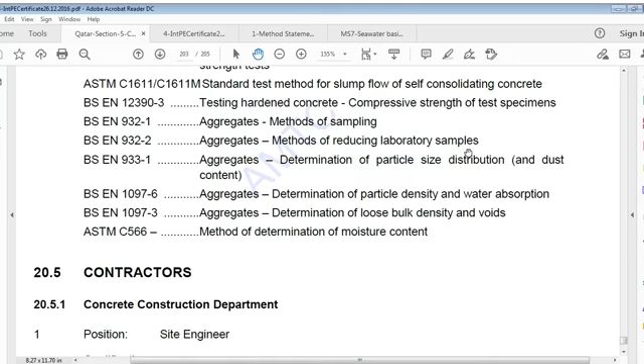Now, contractors, concrete construction department, site engineer: what he should do or should know. Site engineer shall be capable of satisfactorily reading, understanding and performing the below fresh concrete tests. BSEN 12350-1 testing fresh concrete sampling. ASTM C1064/C1064M temperature of freshly mixed hydraulic cement concrete. BSEN 12350-2 testing fresh concrete slump test. BSEN 12350-6 testing fresh concrete density. BSEN 12350-7 testing fresh concrete air content pressure method. BSEN 12390-2 testing hardened concrete making and curing specimen for strength test.

ASTM C1611, C1611M standard test method for slump flow of self-consolidating concrete.

Position: QC manager, QC engineer, material engineer. Qualification: should know about concrete specification review and concrete mixture proportioning, concrete constituent materials, their characteristics and effects on concrete properties.

Fresh and hardened concrete properties, durability of concrete, production and delivery of ready mix concrete, handling, placing and curing of concrete, specifying and evaluating of concrete strength.

Testing of concrete and its constituents, quality control procedures and statistical analysis, hot weather concreting, and troubleshooting concrete problems.

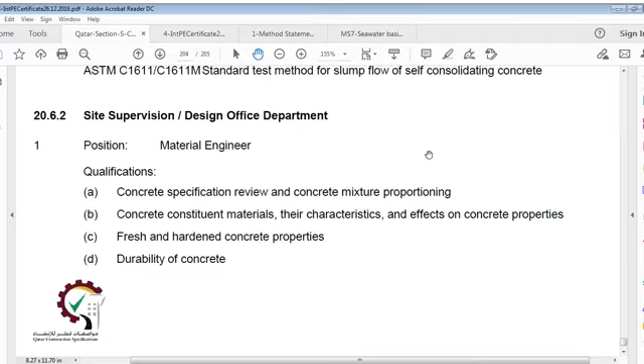Fresh and hardened concrete properties, durability of concrete, production and delivery of ready mix concrete, handling, placing and curing of concrete, specifying and evaluating concrete strength, testing of concrete and its constituents, quality control procedures and statistical analysis, hot weather concreting, troubleshooting concrete problems.

That's what we say. We can say that this is the minimum requirement here, and I think it's too early. We can't just close it like this.

Now we have some revisions here for what we did for this concrete. In this, we said that section 5, part 1, general, was given.

General is the introduction covering the scope, where it is, and which concrete types it covers: pipelines, roadworks, runways, structures, water retaining structures, foundations and bases for structures and equipment.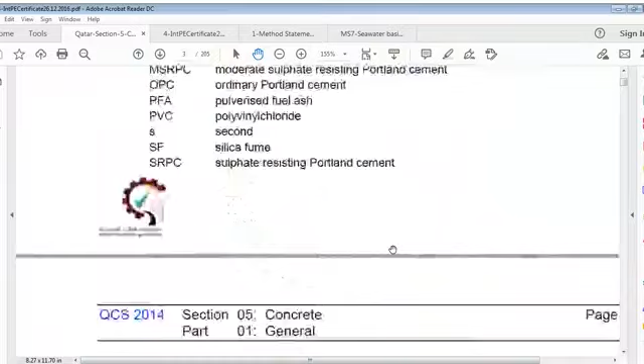Various references were discussed, along with notations, field quality control issues and materials, and what we are actually looking for in all of that.

Then aggregates were covered in part 2, all kinds of aggregates, with the same codal provisions and codal numbers, and all details of aggregates including complete testing details.

The aggregate section was a long one, and it's still aggregate here.

Then cementitious materials were covered in part 3 of this section, including a very important viewpoint on replacement of cement.

It's important not to use OPC cement all the way, but to replace it for many reasons - to make concrete have low shrinkage effect, reduce cracking as much as possible, delay final setting, and control temperatures of concrete. This part covered cementitious materials.

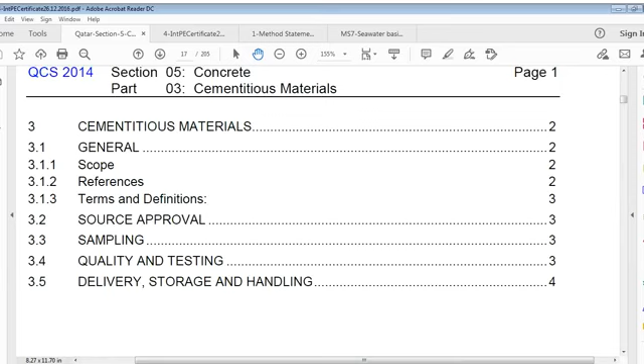We moved on to cover this thoroughly with all codal provisions as usual - sources, quality, etc. - for cementitious materials which are replacements like PFA, GGBS, microsilica, and all that.

Then water, which is an important part of concrete - water requirements, and of course we covered all that is expected in this section.

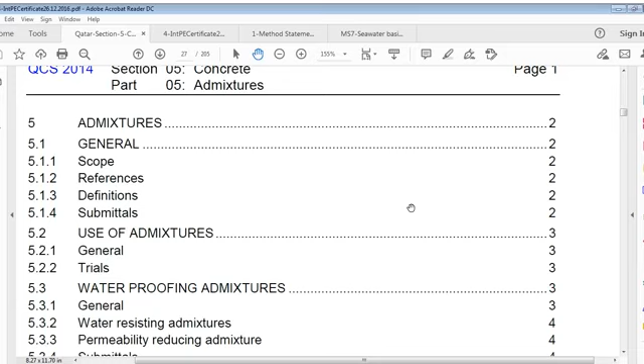Then we moved to admixtures - the technology of admixtures and what you expect from them. Admixtures include different types of plasticizers or others, waterproof admixtures - all studied in this part.

Then we crossed over to property requirements - properties for everything you do.

All the provisions covering classes XO, X1, X2, X3, X4, etc.

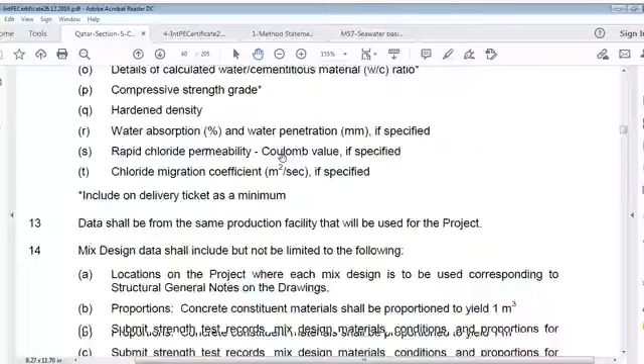We can say OPC, PFA, GGBS, and then all these properties including silica fumes, exposure classes, and others.

And we moved on to this long one, continuing - the property section is very long.

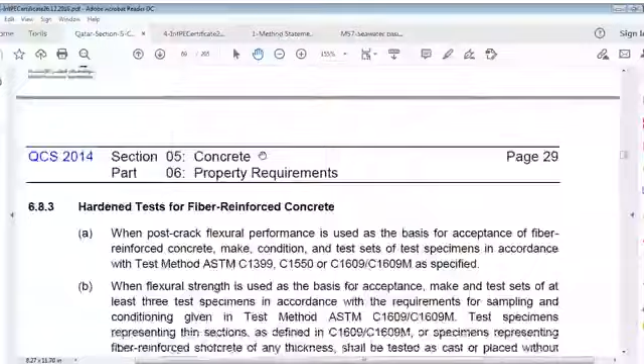A concrete plant is a mechanical system with complete concrete technology.

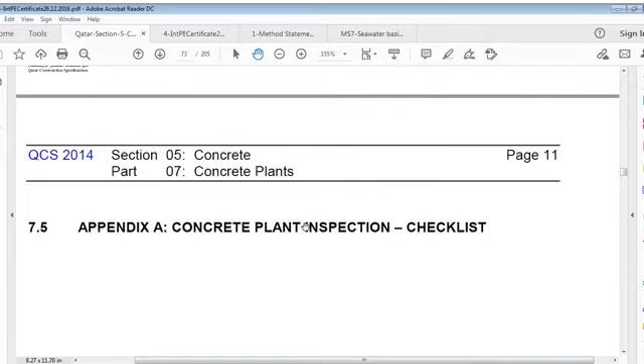Then there is the concrete plants inspection checklist, followed by transportation and placing of concrete.

Now comes preparatory works - formwork. Formwork is preparatory work, and a very important one.

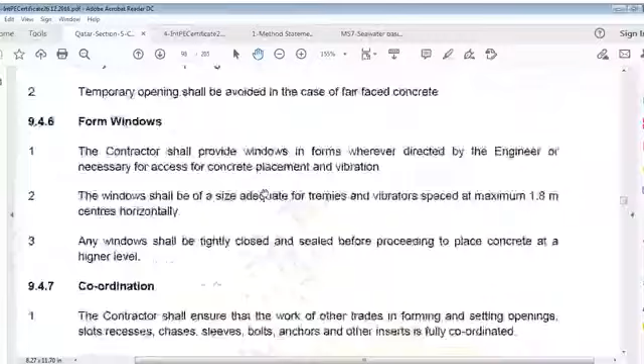Then curing - curing, curing.

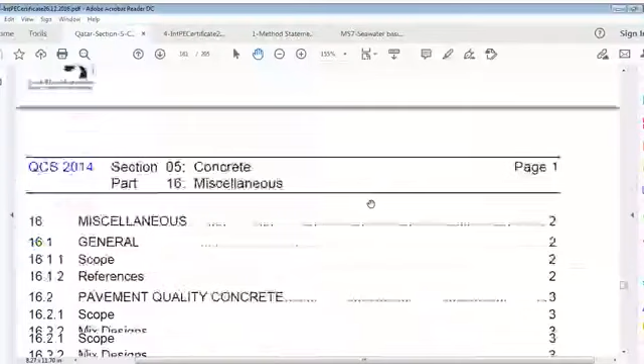Miscellaneous, miscellaneous.